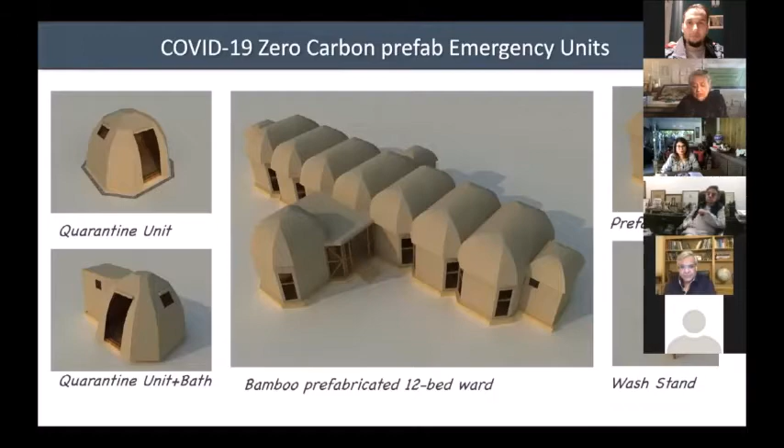So the second to the fourth lectures were based on various tenets of barefoot social architecture, or BASA. BASA is akin to social engineering for bringing about social change, incorporating environmental, cultural, and technical dimensions. On one hand, BASA seeks to democratize architecture that provides people with well-being and self-esteem; on the other, it has partiality for zero carbon footprint. Under BASA, Heritage Foundation has been able to provide humanitarian assistance to over 100,000 persons per year, targeting 12 out of 17 SDGs, or Sustainable Development Goals.

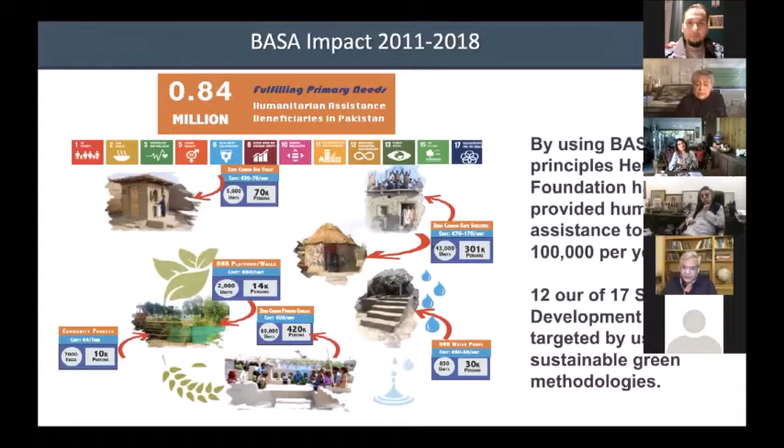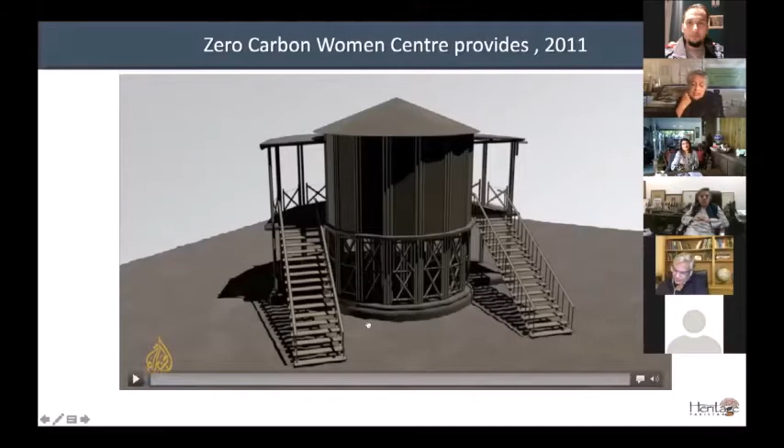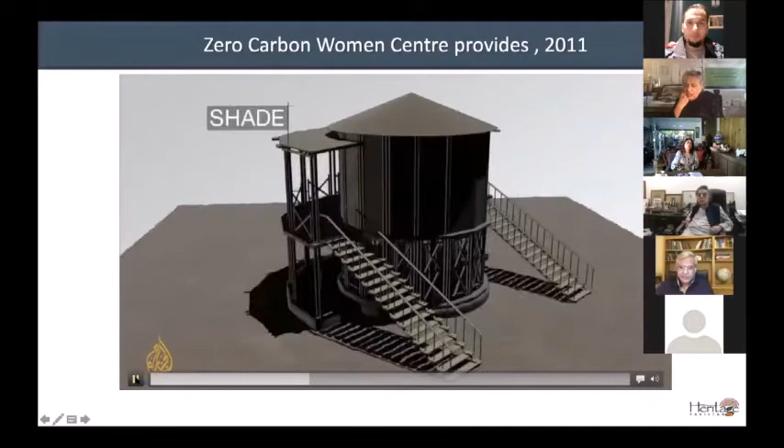In the next slides, we have examples of humanistic architecture as a result of co-building and co-creation. There's the Zero Carbon Women's Center. We won't run the video, it might take too much time, but this shows how even during flooding, you can be safe on the upper level. This was actually done by Al Jazeera. So we can move on to the next slide.

Now we come to the third tenet, which is the delivery of unmet needs through the Barefoot Incubator for social good and environmental sustainability. The incubator helps train mendicant communities, along with monitoring and mentoring, to fabricate products for the other poor in order to fulfill their unmet needs. We don't necessarily teach them to make things for the rich. If they want to buy them, fine, but they're mainly for the poor who really need these facilities to live a dignified life.

There's a whole range of products needed for the poor to survive. As you'll see in the next slide, shelter, water, sanitation, chula, forest, food security, all kinds of things needed for them to live at least a reasonably comfortable life. These are the products they can access at a very economical rate.

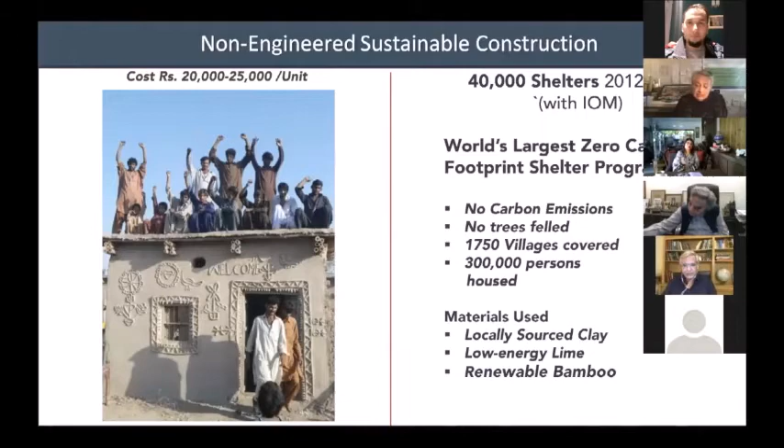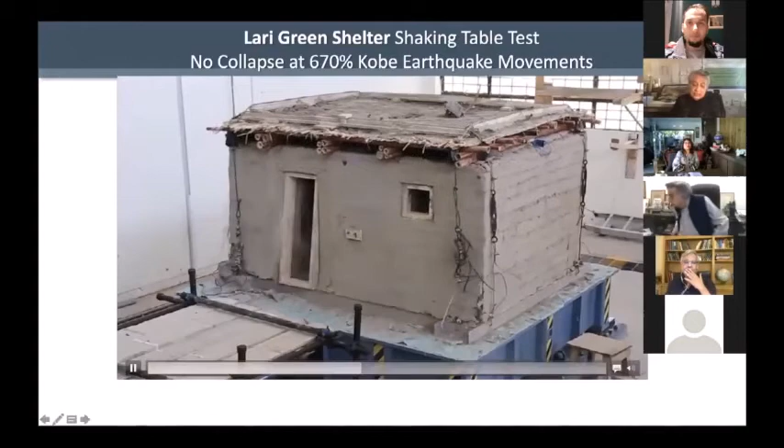The next slide would have shown the whole video, but time is short and Murad is very strict, he told me to keep it to very limited timing, so we'll just show a little bit of it. This is the earth and bamboo structure that did not collapse, even when subjected to 670% of Kobe earthquake movement.

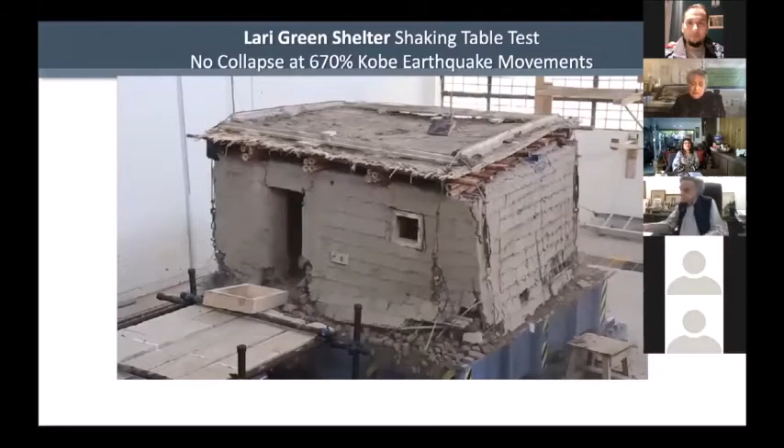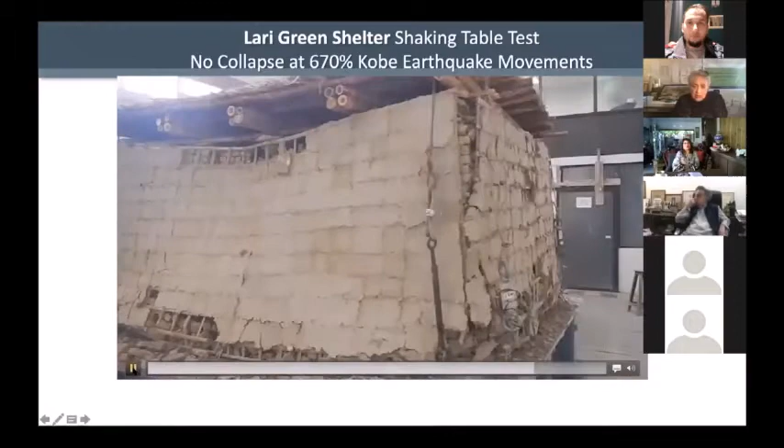So this, I think, is the 670% Kobe earthquake. So we can just watch it. This has gone through several movements earlier. We went up to 25, 50, 75, 100, up to 200, 250, and then to 670.

So now we'll move on to the fifth lecture, engagement of architects and communities with heritage, focused on low carbon methods for saving our heritage. This is LEPI, Lari Emergency Preventive Intervention, which provides the possibility of using very little money to save quite a lot of our monuments. I'd like to show you a couple of slides for that.

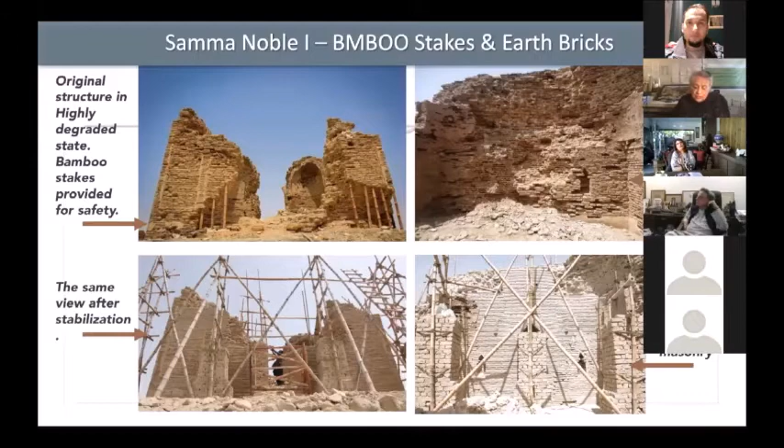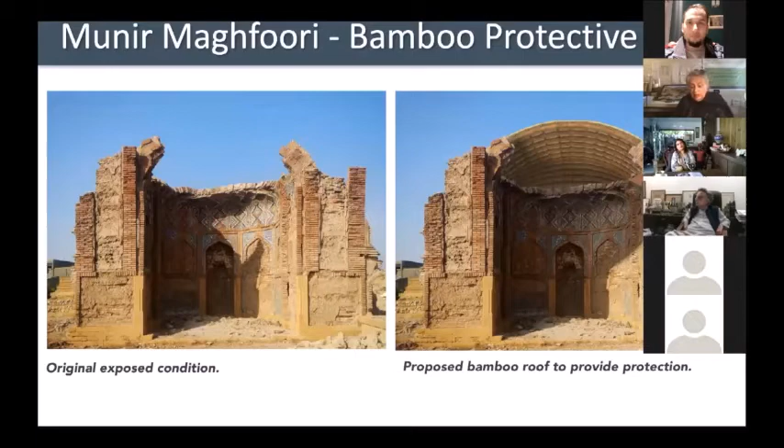So this was really what I had presented until the last lecture. But today we are talking about resetting the world with zero carbon approaches, and I'd like to present some lessons from the past which can form the basis for eco-urbanism and for mitigating global warming.

Now the first one I thought I'd show you would be the zero energy wind cooling that can be attained by the unidirectional wind catcher of Thatta, where incoming breeze provides thermal control, air movement, as well as warm air exhaust. On the left is the book that I wrote in the early 80s, and you can see how beautiful the wind catchers are, and the graphic as to how the air moves.

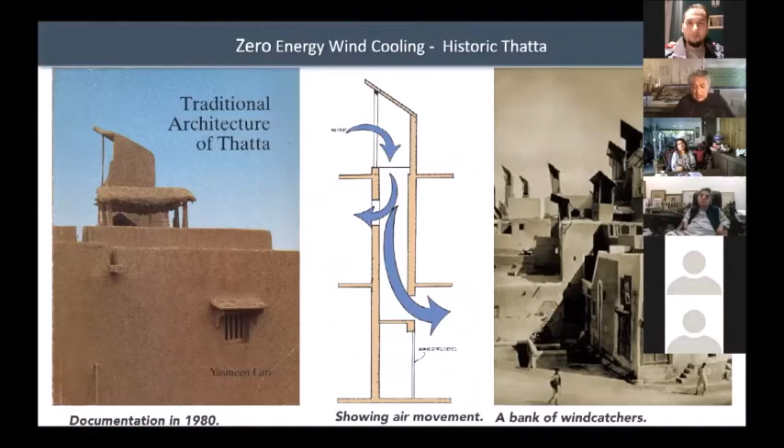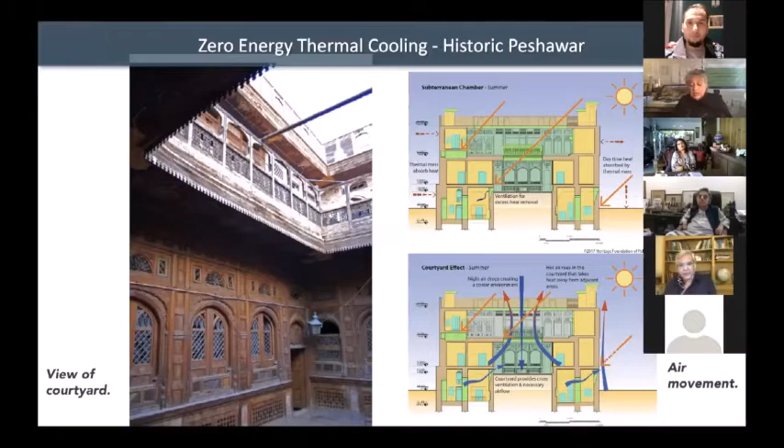And then, of course, there is also the zero energy thermal comfort. This is the slide of Sethi House, this amazing whole mohalla of the Sethis who are in Peshawar. This is achieved by utilizing passive solar design and thermal mass. The courtyard helps to store cool air during the night, keeping the interiors cool for much of the day.

I thought to bring to you, everybody's familiar with this, the fantastic Shalamar Gardens and the Lahore Fort, which are among the best examples. Shalamar Garden is really the best example of zero energy water cooling. This is a Chahar Bagh World Heritage Site, with spectacular water displays, creating a cool environment entirely by natural means. Water is also used in the paradisal quadrants in the Sheesh Mahal enclosure of the World Heritage Lahore Fort that you see on the right.

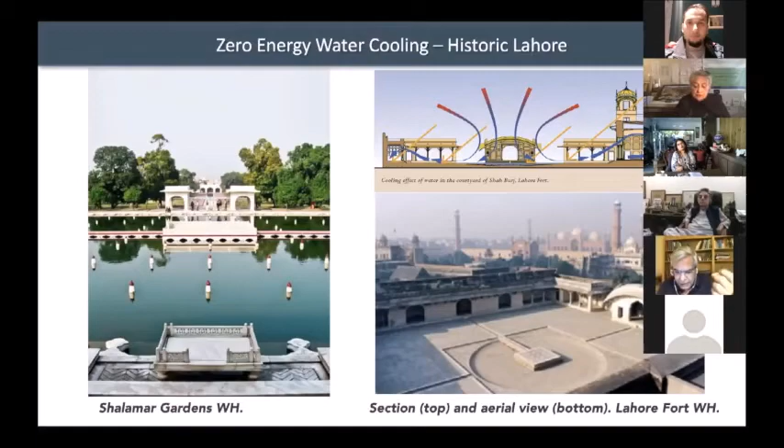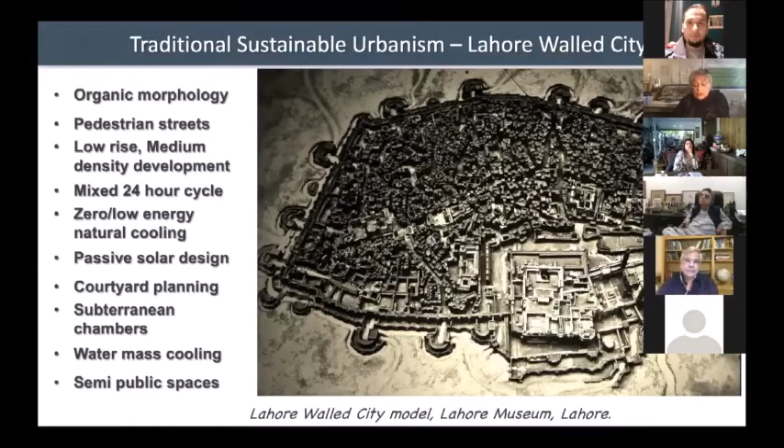Now such attributes can lead our cities towards low carbon resilience and enable us to help contain emissions to within 1.5 degrees centigrade rise required by the COP21 agreement of 2015 in Paris. I'm not sure that we are reaching it because I think the news is not so good. I don't think many countries are really trying hard enough. So then what I thought we should discuss really, to me, traditional urbanism really is equal to ecological urbanism.

And many of us really believe in it, certainly myself. I think this is something we should be working towards.

Being responsible for 65 to 70% of greenhouse gas emissions, our urban centers will remain global warming battlegrounds unless urban professionals devise ways to convert them into eco-cities. Traditional urbanism is a result of local wisdom, use of sustainable materials and techniques for minimizing the use of energy. Thus, we need to adopt design principles that can help transform our present wasteful urban centers into low-carbon eco-enclaves.

For example, creation of compact cities, not urban sprawl models; low-rise, medium-density mixed-use developments, not skyscrapers; vehicle-free, walkable enclaves, giving preference to public transport rather than private vehicles; greenery and water bodies; low-impact hybrid architecture that minimizes energy consumptive materials; and above all, saving all heritage buildings, as any replacement will only add to further carbon emissions.

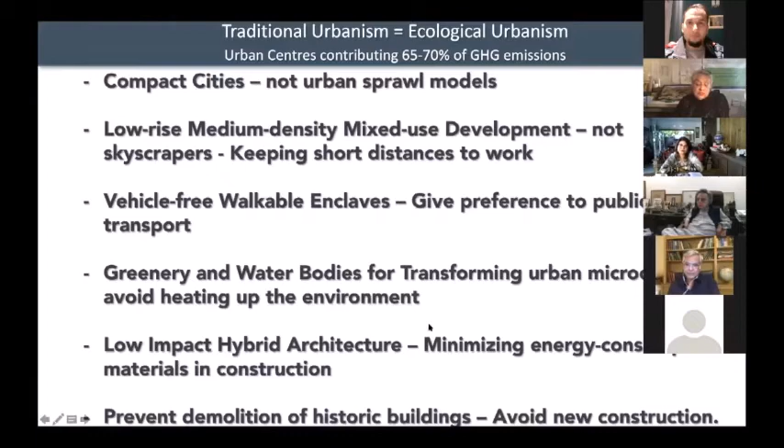So I thought I'll present to you one project that we are trying to now implement. I'm not sure what will happen with the COVID situation, but here it is.

This is an alternative which I've developed for Karachi. The concept is based on using surviving heritage buildings as our anchor.

This is the first of the 13 segments that we have designed. I'll just run through it very quickly.

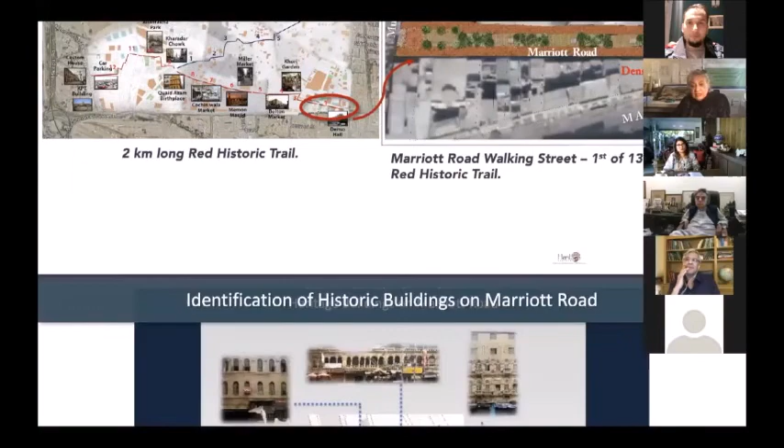Now what we are doing is really trying to restore historic buildings that are identified along the trails. In the next slide you can see these are the ones that are there, and we are hoping that we might be able to start restoration work in them.

I'm hoping that many architects will get involved in this kind of work. These have all been identified and notified, so they can't be demolished, but they are in a highly degraded state.

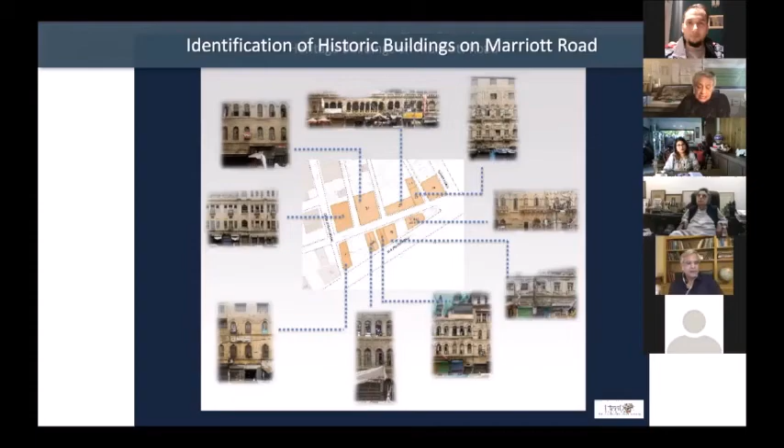And then there is this concept that I thought I'll show you, which is a low carbon, climate smart, vehicle-free street showcasing Karachi's 19th century heritage, which becomes available for outdoor cultural activities as well.

And we have 4 urban forests in them, and we also have a lot of terracotta cobbles. We will not use any concrete. It's all low carbon, no steel, no cement, and so on and so forth.

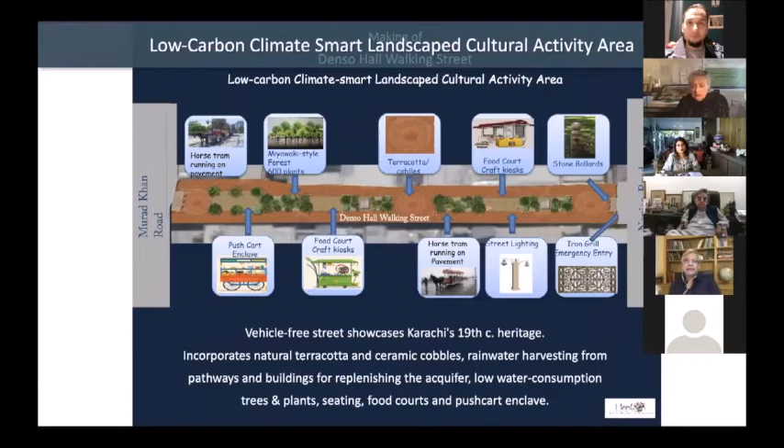So I'll show you very quickly how the Marriott is at the moment. If you go to the next slide, this is what it is like now. And if you go to the other one, you can see what we are planning to do. Yes, there it is. So this is an example of what might be done.

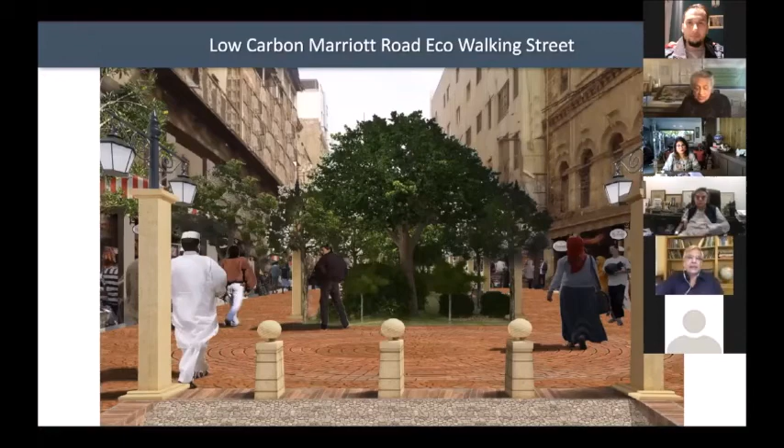And this can be done in any city, really. I think we need to now convert a lot of vehicular streets into walking streets.

As I said in my keynote to 2020 UCLA graduates last week, we must be ready for a paradigm shift in our design conceptions as we prepare ourselves for a world that requires a major reset. We should begin redesigning our urban centers to transform the present carbon intensive environment to an inspired architect and urbanist diction which would tread lightly on the planet.

Also, I believe that New York, with its highest infection rate and its high carbon, high density, glittering towers, will no longer be the urbanist future beacon.

Instead, as we get accustomed to carrying out business remotely, eco-urbanism will take root, drawing upon age-old wisdom and traditional environments, such as Pakistan's historic cities of Thatta, Lahore, or Peshawar that I've mentioned, aiming for low-rise, medium-density formations with open-to-sky terraces for families to remain in contact with nature when a pandemic strikes, with pedestrian enclaves and local round-the-corner shopping, without being disrupted by vehicular traffic, which should be rightly relegated to the periphery.

Now, as the need for extensive vehicular mobility is curtailed and consumption levels are reduced, in the new world order, eco-cities would embody the virtues of carbon-neutral environment, nature conservation and biodiversity enhancement, and conversion of existing vehicular roadways into landscape forested walking streets for lowering pollution levels, interventions that lead to better health and well-being of humankind.